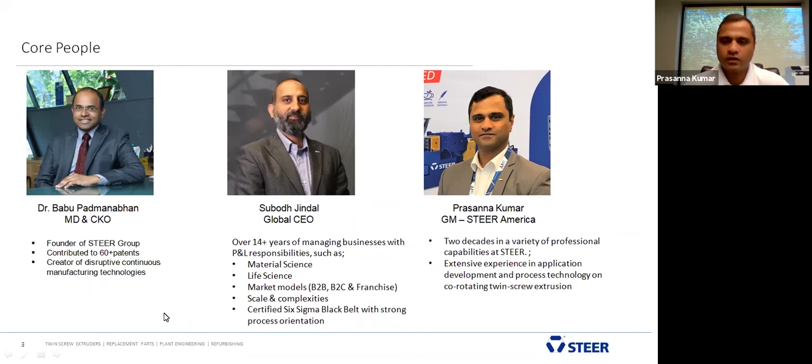Our Steer America office is in Cleveland, Ohio. We have an application development center here as well with 2 machines. One is a 50 dia machine and a 20 lab machine. We are 500 plus employees, 60 plus patents, and 1 million elements sold so far. And we have around 825 extruder installations globally.

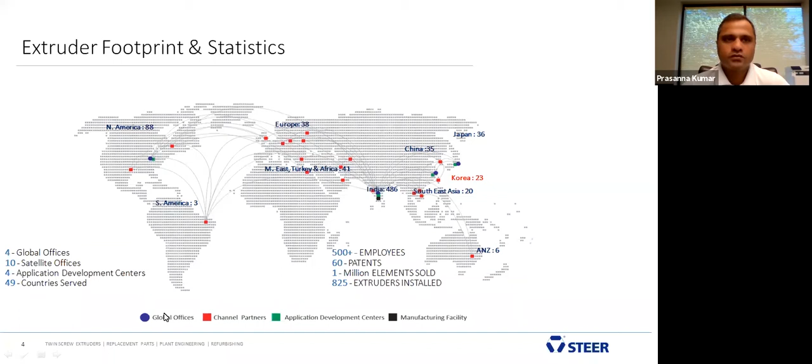We are the only company that's very much vertically integrated, starting from manufacturing the steel up to the end assembly, and everything is done in-house. So we have much better control over the quality and quantity. The industries served are polymer, pharmaceutical, powder coat, food, bioplastic, and biorefining.

We also have 3 different models of extruders. One is mega platform, which is similar to 1.55 DO by DI ratio, available in the industry. We also have 1.49 DO by DI ratio, and Steer's own platform, which is Omega at 1.71 DO by DI ratio. So if you have an existing line which is 1.55 and you're planning to add another line, we can definitely do the same configuration where you'll have interchangeability. That's one of our core strengths.

Our business is divided into 2 parts. One is parts, as in elements, barrel, shaft. For any make, any model twin screw extruder, we can manufacture, we can do reverse engineering, and we have already done this for many customers. And of course, the other 50% is the TSE business that we do.

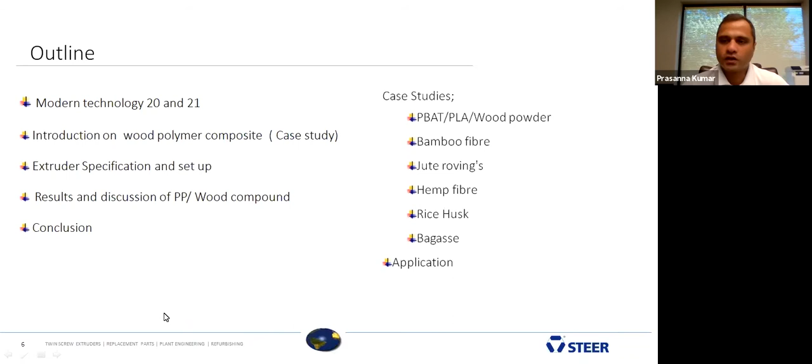I'm going to talk about wood composites and natural fibers, and also discuss today the modern technology - what is 20th century and 21st century. I'm going to discuss wood composite case studies, extruder specification setup, results and discussion on WPC, wood composite. There are a couple of case studies like PBAT and PLA with wood composite powders, bamboo fibers with polypropylene, jute rovings and jute powder with polypropylene, hemp fibers, rice husk and bagasse. These are some applications we are going to discuss today on this topic.

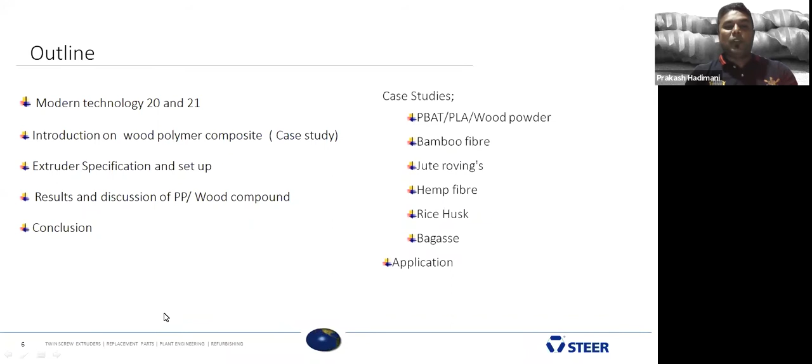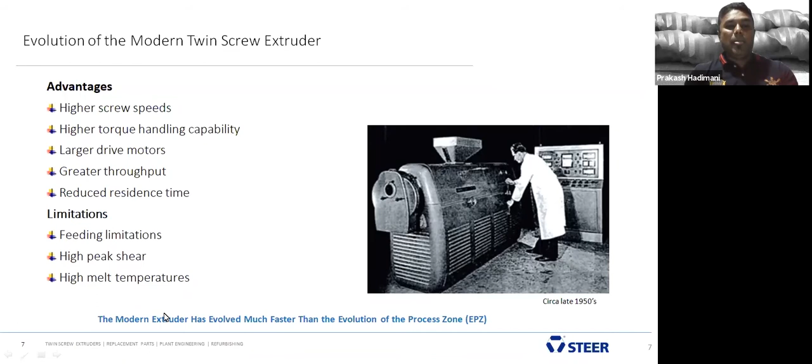It consumes high mechanical power consumption - we call it higher SME, specific mechanical energy. And it also liberates peak shear. The peak shear is not acceptable for low bulk density materials or natural fibers, because the peak shear degrades fibers and liberates black specks. For some applications like flame retardant, that's also not acceptable, and very sensitive materials - it is not acceptable for peak shear.

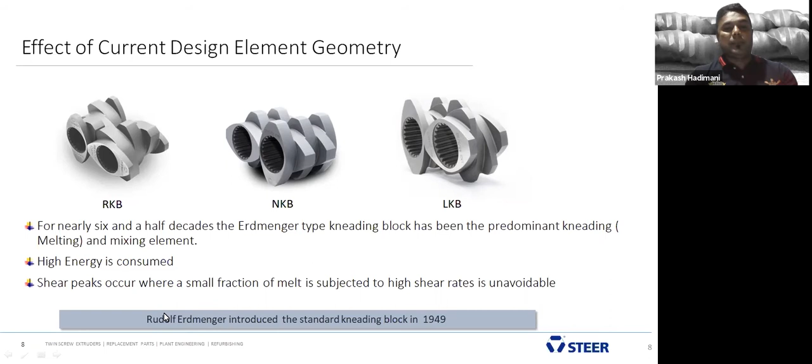What is peak shear we are talking about? When bilobe elements, two lobes, connect, in between there are two lobes - you see here - this area, the first zone, is completely molten material, stagnant. There is a complete pool of melt, and when it goes to the next level, the gap narrows and narrows. There's hardly 3% of melt trapped between the two lobes, and that leads to peak shear that liberates temperature, goes higher, and degrades the polymer.

To overcome these, new material development compromises ourselves. When you're going for standard kneading technology, you cannot use sensitive materials like halogen, non-halogen materials, biopolymers, pearl pigments, and also reinforcement and natural fibers. When you are going for new development, we have to compromise ourselves with a standard kneading block. The peak shear rate results in decomposing flame retardant filler and biopolymers, and degrades the polymer.

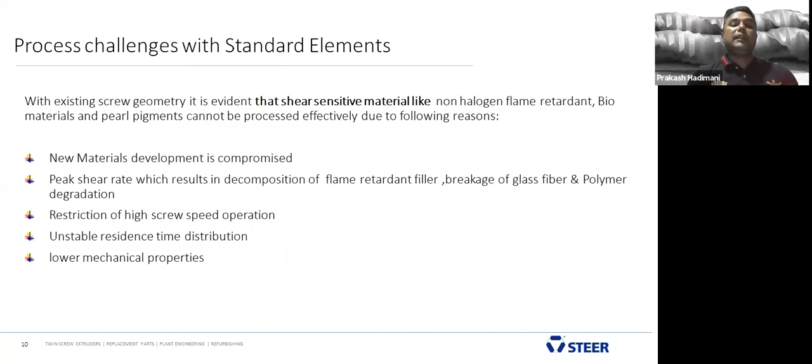Restriction of higher screw speed - the extruder is built for 1200 RPM, but we have to restrict ourselves. When running at 1200 RPM, because of the peak shear, the polymer starts degrading and turns yellow. That's why many operators compromise themselves to run at lower RPM, like 600 RPM. How to overcome this situation? Residence time is not stable - every time there is a change in residence time, and it also lowers mechanical properties. When the polymer starts degrading, the mechanical property drops down.

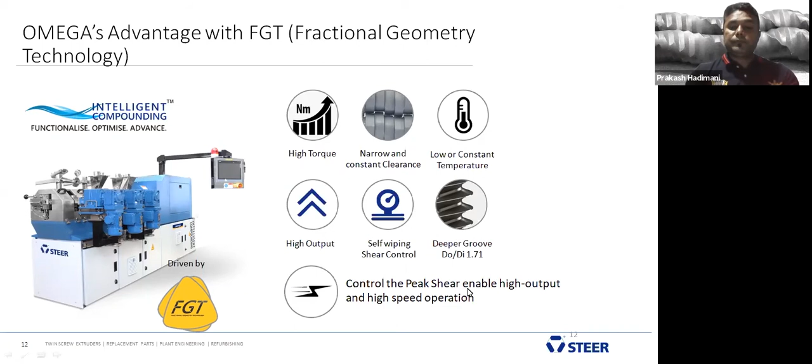To overcome this, we have fractional geometry technology. What is the advantage of fractional geometry technology? Like in the Omega platform: higher torque capability, narrow residence time, narrow clearance, constant clearance through the system, and we have deep grooving like DO by DI 1.71, higher free volume, self wiping, and higher throughput. This controls the peak shear while enabling increased throughput - this is fractional geometry technology.

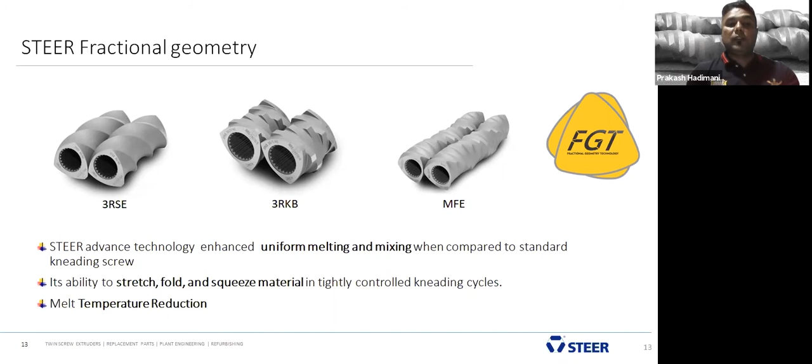3RSE - eccentric conveying elements - convey the material to the next level, advanced technology. And 3RKB provides uniform melting through the system - there is no variation in shear rate, uniform shear rate, and gentle melting takes place in the polymer. MFE, mixing fractional elements, act with a stirring effect, stretching and folding, squeezing the material in the kneading cycle, and also reduce the melt temperature.

What's the mechanism of dynamic stirring elements and fractional mixing elements? When we have wood powder, it has to wet in the polymer matrix, achieved due to the stirring effect. It reduces the melt temperature and also ensures uniform shear rate throughout the system, and distributes the polymer and wood composite, increasing the elongational flow by using fractional mixing elements, which also improves tensile and impact strength.

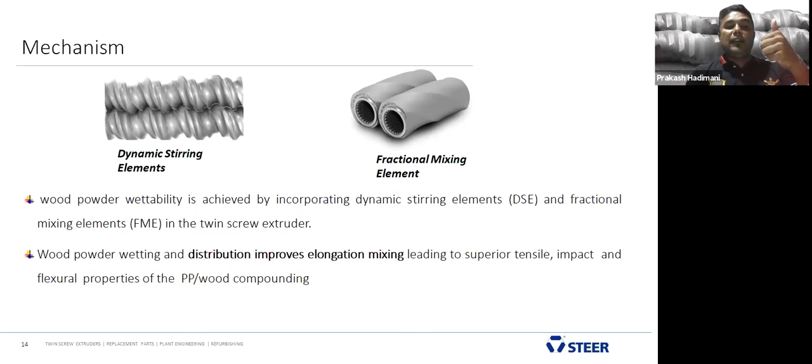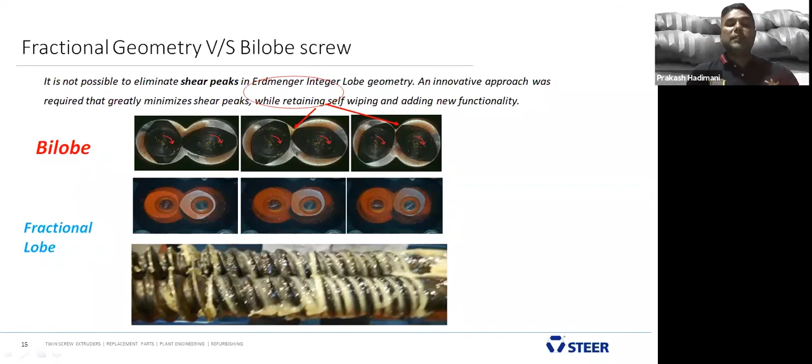There's no degradation. If you see the photo below, it shows the input raw material is white in color, and finally at the metering section, you see that the complete blend is white in color.

If you talk about animals, you can see horn powder and chicken feather - these all come under animal. I'm just giving two examples, but these two examples we have already processed and given solution technology to many of our customers.

When it comes to plants, there's stem - examples like jute and hemp, and also banana fibers. Then there are reeds and grasses like bamboo, and the second thing is bagasse.

When it comes to wood powder and lignin powder, these two we are going to discuss in today's seminar - wood powder and lignin powder along with our biodegradable polymer and the synthetic polymers.

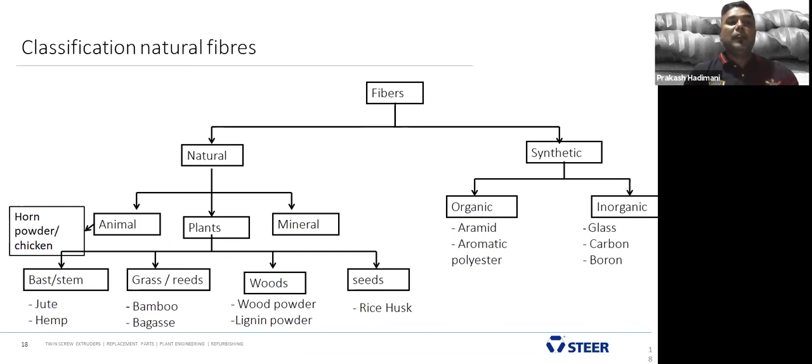Main producers of natural fibers: cotton - everybody knows that's China, India, and USA. Jute is highest produced in India and Bangladesh. There's a big list depending on the fiber - for coir, it's India and Sri Lanka. There are many more.

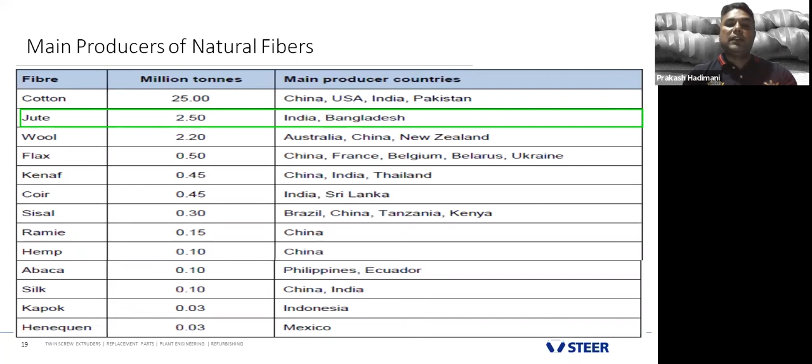If you talk about hemp, it's mainly China, not India, not USA. These are the main hemp producers. And if you talk about silk, producers are China and India.

Why do we need bio-based natural fibers? It's easy - there are many advantages of a biofiller. These are biodegradable, easy to biodegrade. Second, they're readily available, depending on availability. Third, low cost, eco-friendly, and they minimize waste. These are the main advantages of why we need natural fibers.

In the automotive industry, the lightweight advantage comes down drastically because initially the density may be 2.5 or 3, and later when blended with polymer and natural fiber, it comes down to 1.2, so the weight of the car is reduced drastically - that's economically beneficial.

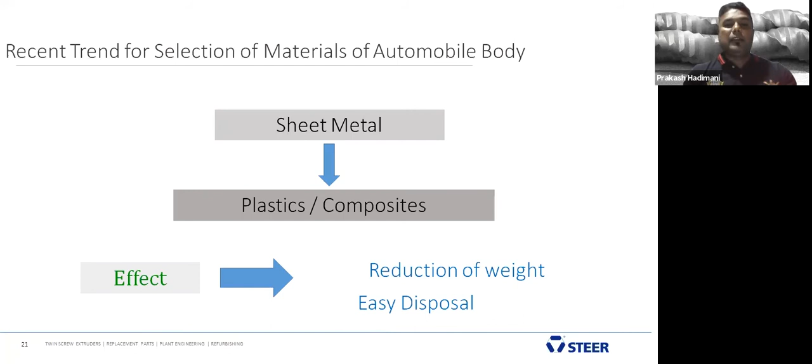Recently, material trend in the automotive industry - initially they were using sheet metal, and later started using plastic and composites. What's the effect? Reduction of weight and easy disposal.

Natural fiber has to be mixed with the polymer. How do we do that? Reinforcement like jute and wood powder are hydrophilic in nature, while the polymer matrix is hydrophobic. We need to mix these two using a compatibilizer as a bonding agent, and a twin screw extruder to distribute the fiber into the polymer matrix and get homogeneous mixing.

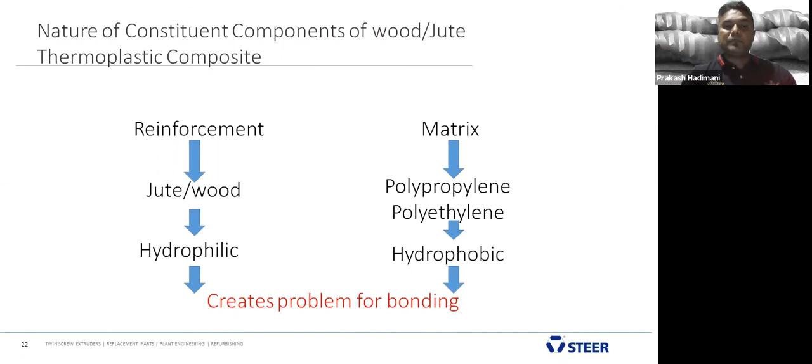Now we go to the first case study of wood powder. Why do you need wood powder? The wood powder blends with the polymer, and any shape can be molded. If you take just wood powder or jute powder alone, can you mold it as you want? No, we cannot. But when you mix it with a polymer, the shape can be formed as required, for construction or any other application, depending on your needs.

That is the beauty of WPC, wood composite applications. Depending on the requirement, color can be added and changed to red, blue, or many other colors. But if you're using natural wood, the color cannot be changed. Whatever color you get, that's what you need to work with. When you make it into WPC, the color can be whatever you want.

If you compare plain wood and WPC, WPC stays for a longer period of time. The wear and tear is reduced because of the polymer coating, which withstands longer and reduces moisture content. If you leave wood in a humid environment for a long time, it starts absorbing moisture and loses its properties. But polymer-coated WPC retains its properties for longer, and moisture absorption is very minimal. There's also better heat resistance, making it suitable for building, construction, and many other applications.

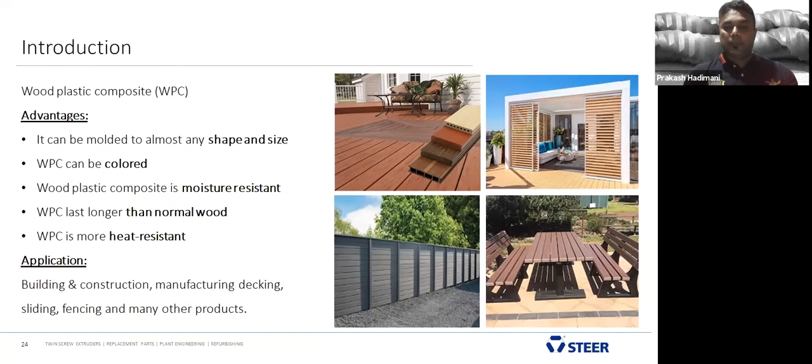I'm comparing the current technology with our FGT technology. The current technology I'm talking about today is counter rotating, a two-stage process. Still, 80% of customers in the WPC and natural fiber industry use single screw or counter rotating methods. What are the drawbacks of counter rotating? You cannot go more than 60 RPM; it runs at a lower RPM. But Omega is a single stage process, unlike counter rotating which is two stage, where you have to mix and then go to the next level.

Omega can run even at 300 to 600 RPM. With counter rotating, if you pre-mix everything, you have to pre-dry it. But with twin screw, you don't have to pre-dry; you can just feed it into the extruder using a split feed method.

Counter rotating results in poor dispersion quality and elongation, while twin screw extruders give higher dispersion. With counter rotating, to get higher throughput you need a larger extruder. But with twin screw, the smaller the extruder size, the higher the capacity, because a smaller extruder is capable of giving higher throughput. Counter rotating also has higher SME, while TSE has lower SME and lower power consumption. There's also batch to batch variation in counter rotating, but no variation in TSE since it's an inline process. TSE also gives higher throughput with FGT technology compared to lower throughput in counter rotating.

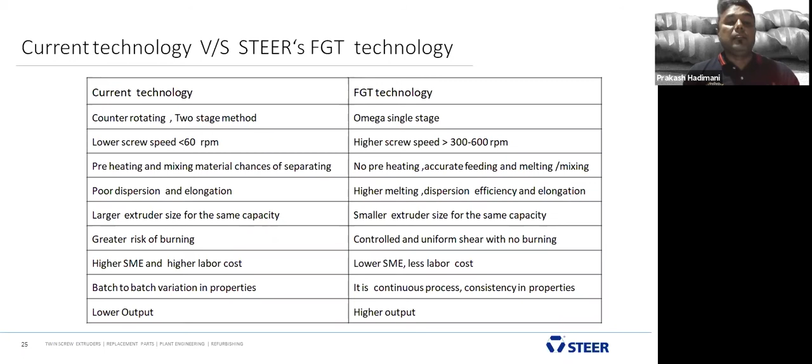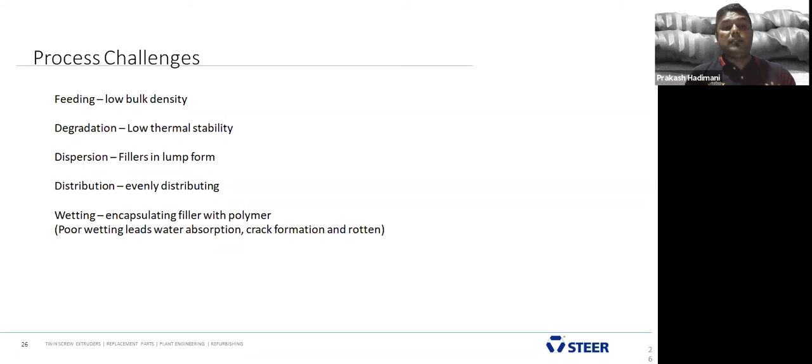What are the process challenges? Currently in TSE there are many challenges: feeding low bulk density material, and natural fiber tends to degrade, form lumps, and absorb moisture. Wetting wood powder into the polymer matrix is the biggest challenge, and dispersing it is another challenge with wood powder.

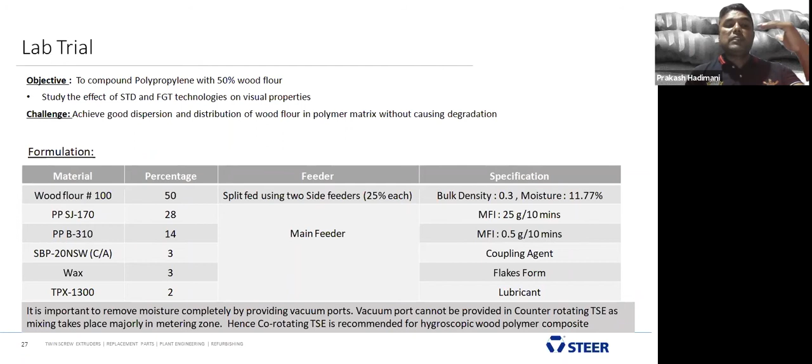We have done a lab trial on WPC. Our main aim is to conduct a trial. We used two technologies: one is standard bilobe technology, currently used in the industry for twin screw, and we also used FGT technology. We took these two screws and technologies in the twin screw extruder and used polypropylene and wood composites.

The wood powder content was 50%, with a mix of polymer, polypropylene and others. We used two wood powder sizes, one 30 mesh and another 100 mesh, and fed through a split feed method, 25-25, in two stages.

The bulk density we used was 0.3 or less, and the moisture content observed was almost 12%. We didn't pre-dry, since our twin screw extruder, the FGT, is capable of removing moisture.

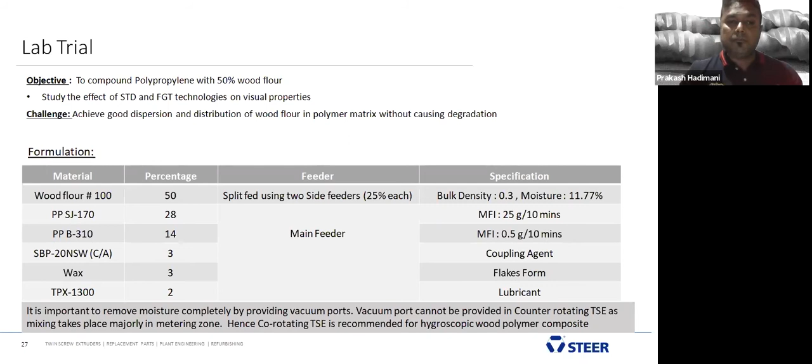The screw speed was 350 to even 600 RPM. The throughput was 100 kg in the 40 millimeter extruder. With 100 mesh, the specific mechanical energy increased, but with 30 mesh, the specific energy reduced.

Mixing takes place because we used two standard technologies: one is the standard bilobe technology, second is FGT technology. Only the screw changed, but the feeding method and everything else stayed the same. Process parameters were not changed, and we collected standard technology samples and FGT samples, tested them in an injection molding machine, and took results.

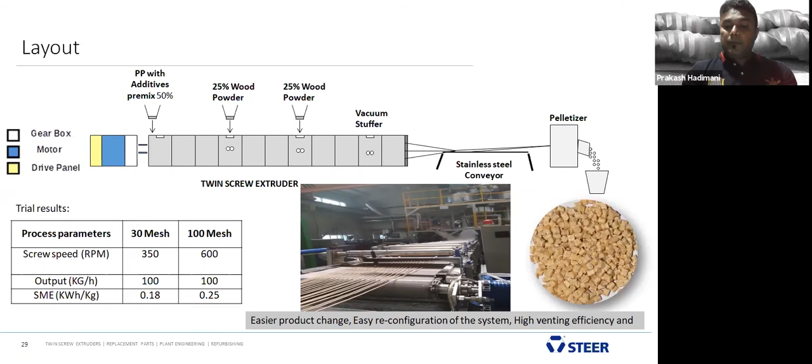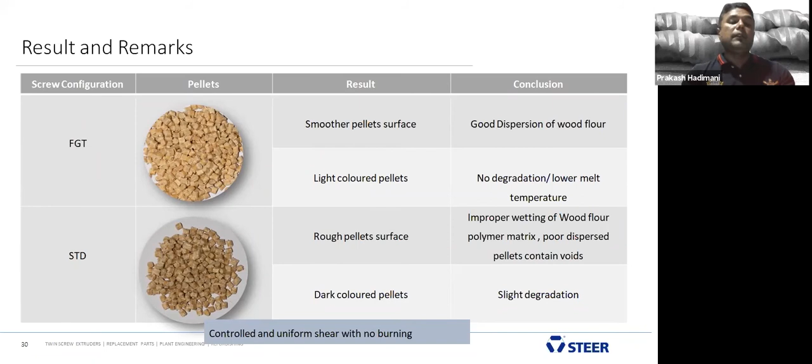In the standard technology, we observed a rough pellet surface and higher moisture content. More interestingly, the pellets were darker in color, and we observed slight degradation. The wetting was very bad, improper wetting of the pellets, and poor dispersion of the wood powder into the polymer matrix. We also observed many voids and particles in the standard technology, possibly due to improper wetting of fiber, distribution and mixing.

If you use fractional geometry technology, it reduces the melt temperature with no degradation, and the shear rate throughout the system is lower. There's no degradation of wood powder in the FGT, but we observed degradation in the standard technology.

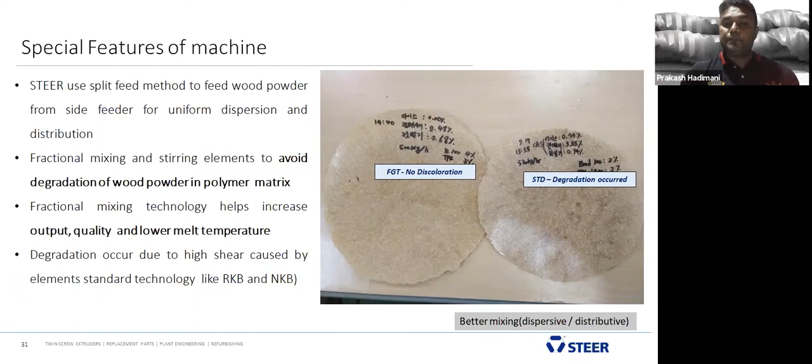What benefits does this give after using FGT technology? We finally observed that with FGT technology, we can handle biodegradable polymer, polyethylene, polypropylene, PVC, and PLA. We can do combinations of these, and we've also done a series of studies with wood fiber, sawdust, jute, bamboo, rice powder, and many others. This combination we provide to the customer.

Using FGT technology gives controlled elongation mixing and lower temperature, and also good dispersion and distribution of the pellets, high quality pellets, and no degradation in the fiber. It helps customers load up to 30 to 60% of wood powder.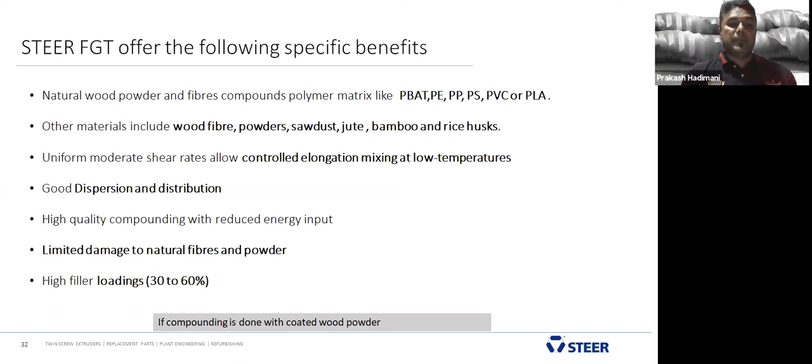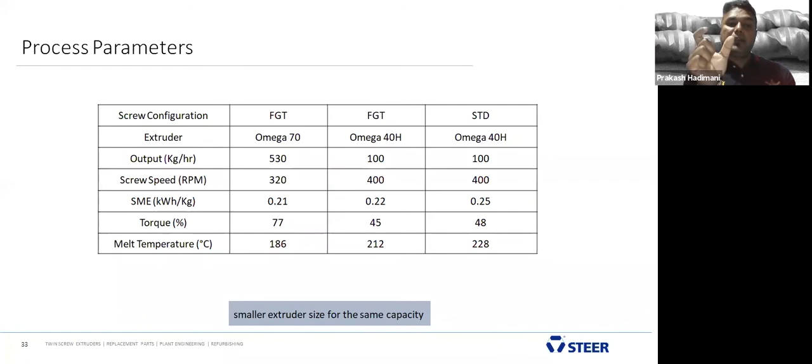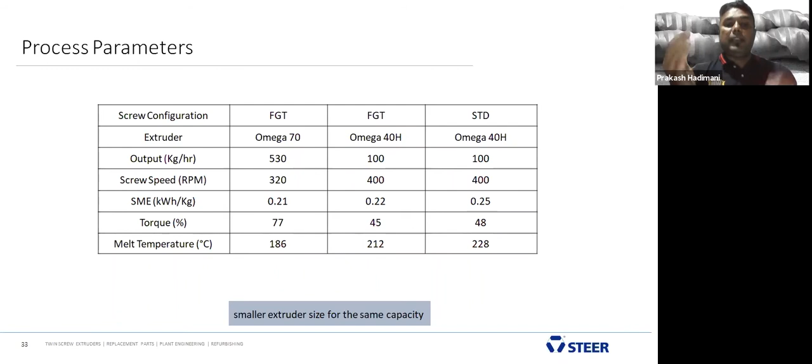This is a similar comparison study we did in our lab. For FGT technology we used a 70 millimeter extruder, Omega, and also FGT technology on a 40 millimeter, so we could compare the difference between the 70 millimeter and the 40. When scaling up, we didn't find much difference between lab scale and bigger scale, but we did observe a difference with the standard technology.

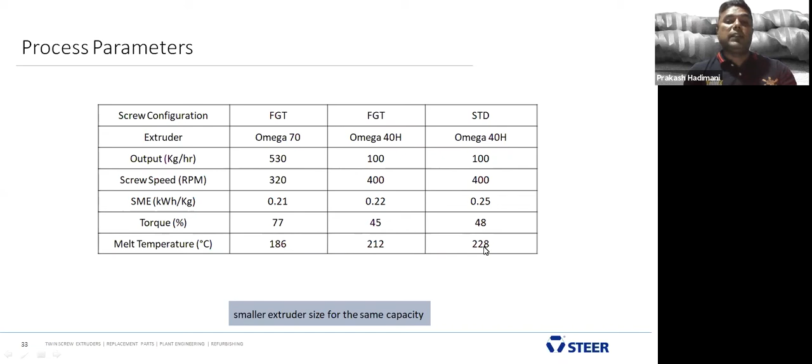In the 70 millimeter extruder we achieved 530 kg per hour, but for FGT in the Omega, both standard and FGT maintained the same output, 100 kilo, with constant RPM. Looking at specific mechanical energy, power consumption was higher in standard technology compared to FGT. Also, melt temperature showed a 40-degree variation between our 70 millimeter FGT technology and the standard. FGT 70 gave 186 degrees centigrade, but standard technology gave 228, a 40-degree higher melt temperature in standard technology.

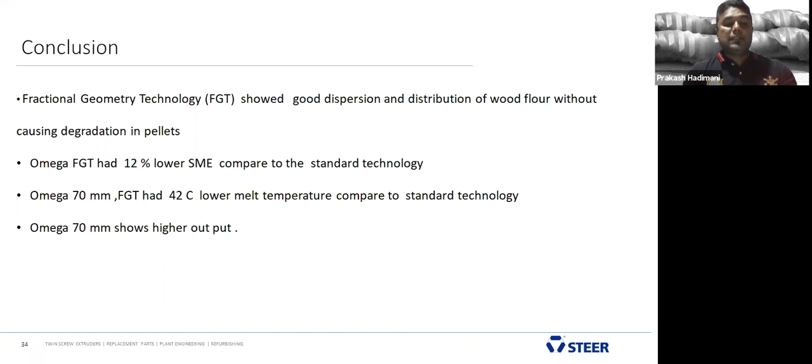Finally, we concluded for WPC wood composite: fractional geometry technology showed good dispersion and distribution in the wood powder without causing any degradation on the pellets. Omega FGT has 12% lower SME compared to the standard technology. Omega 70 millimeter FGT technology had 42-degree lower melt temperature compared to standard technology, and Omega 70 millimeter showed higher throughput compared to the standard technology of 40 millimeter.

Now we are going for the biopolymer. The first case study we demonstrated was on polypropylene and wood composite, and we did a similar case study for biodegradable polymers, biodegradable PBAT. I will not go much deep into the biodegradable polymer, but I'll show you the sample. What we did: 80% of PBAT, polybutylene adipate terephthalate, and 20% of wood composite. We blended and observed good dispersion, and also added 30%. We are planning to go for 40% and 50% next, and are still working on 40% of wood composite into the PBAT.

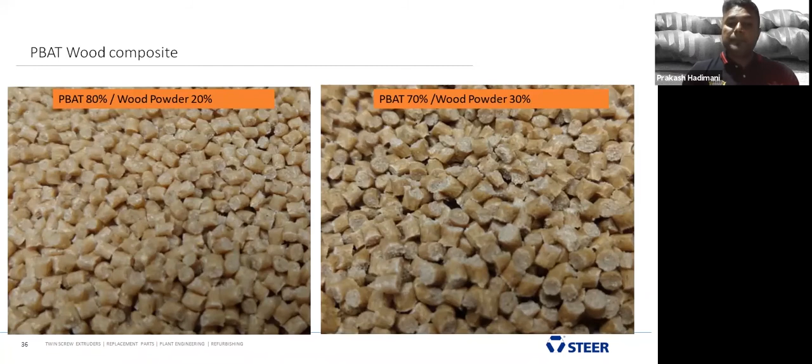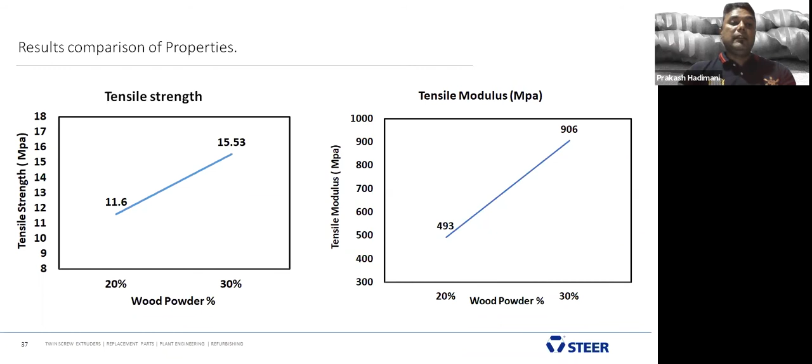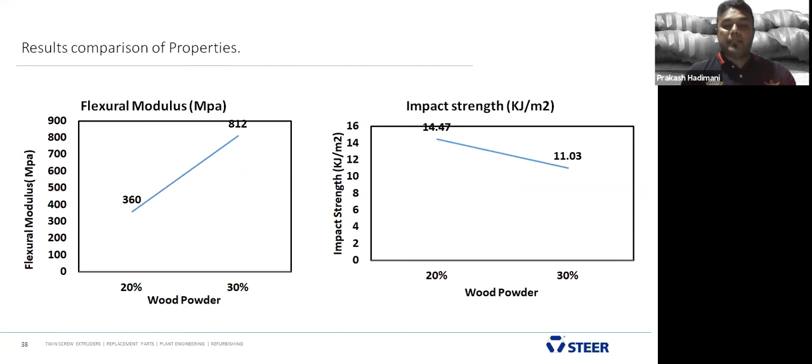We did a similar study for PLA, polylactic acid, with wood composite at 20% and 30%. We were able to manage the compound, but unfortunately, when it went to injection molding, we could not make injection molded samples. Maybe we need to go for compression molding and other studies. The injection molded sample didn't even flow in the injection process. We are planning to understand further why it is not flowing in injection molding, maybe due to viscosity. The compounding is not an issue, but when going for molding for the next study, we could not make it.

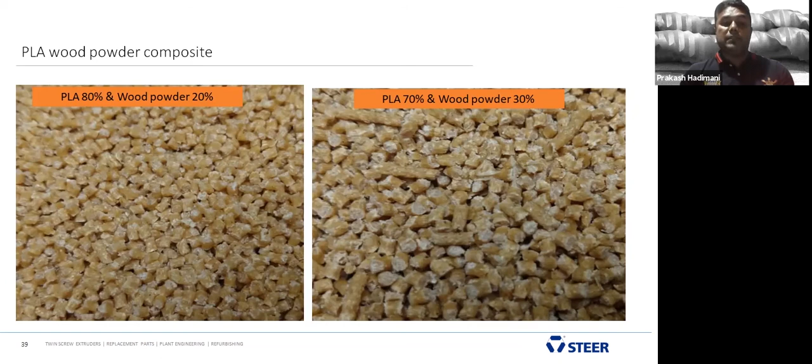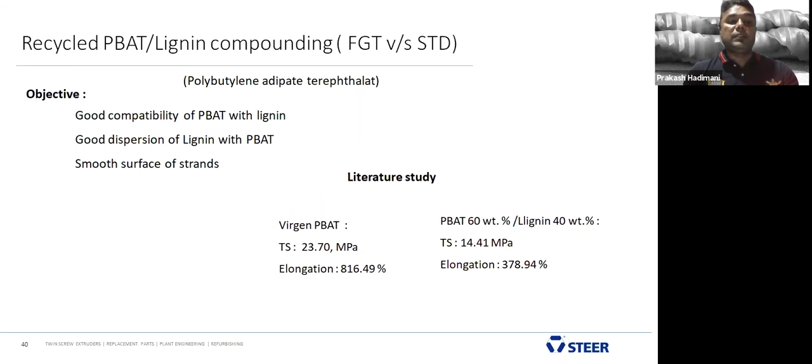The second study we did was on recycled PBAT with lignin powder. We studied many literature surveys. Our main objective is to get good dispersion of the lignin powder with the PBAT, and also a smooth strand surface. We also did some literature survey on virgin PBAT mechanical properties. When you combine PBAT 60% and 40% lignin powder, you get 14.4 megapascal tensile strength and elongation of 378. It also depends on the grade of PBAT used; elongation depends on that grade.

In this study, we fed PBAT from the intake, made it into homogeneous form, melted it, and added 30% lignin from the side feeder. We used our FGT technology to mix and distribute completely, and then took the sample out. We used a 25 millimeter lab extruder. We did two studies: one with 17% lignin powder and one with 30%, with PBAT at 83% and 71% respectively. We maintained constant throughput of 10 kg throughout the system. T1 shows the FGT technology.

We compared standard versus FGT technology. With FGT technology, we observed power consumption of 3.7. As the addition of lignin increases, there is an increase in power consumption - at 17% and then at 30%, there is an increase in power consumption and SME increases. Melt temperature doesn't change much. But comparing standard versus FGT technology, keeping RPM constant at 300 for both, the torque is slightly increased in standard technology, and power consumption is increased in standard technology. We also observed peak shear and degradation, and a slight increase in melt temperature with the standard technology.

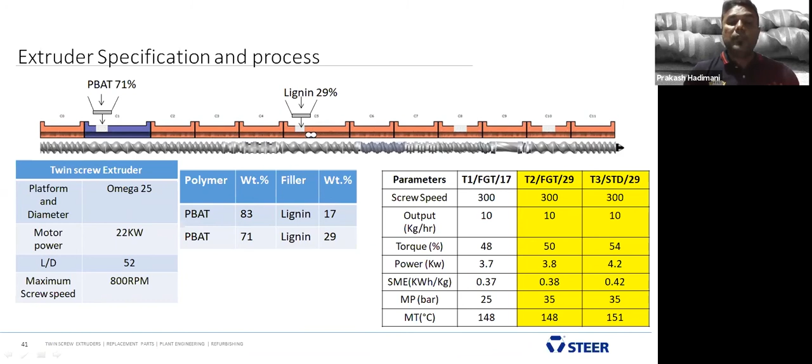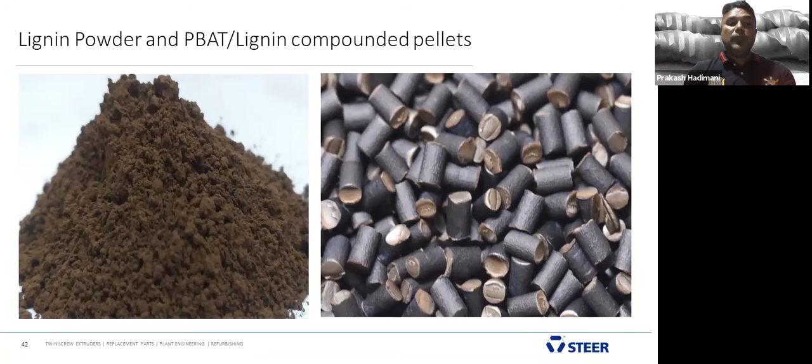If you see the rheology study on virgin PBAT versus recycled PBAT, we observe we are getting thermal stability at 2.29. When you add lignin, it increases the thermal stability even further, and at 30% there's still further increase in thermal stability.

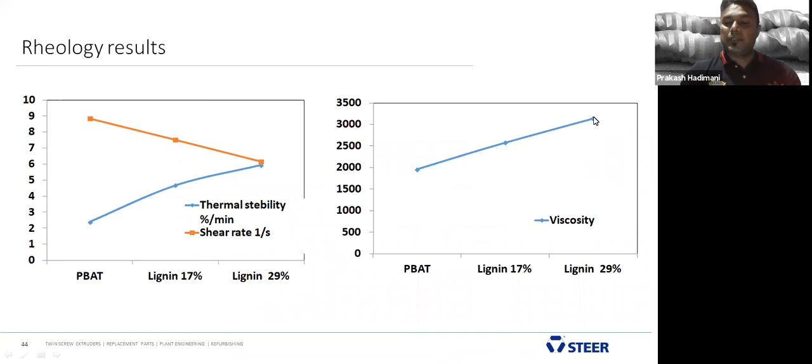The second case study we are going on is jute polypropylene. There are many advantages to jute polypropylene: it gives you lighter weight, and here we have used FGT technology to improve it. There are many challenges too; feeding of the jute into the polymer matrix and into the TSE, twin screw extruder, is the biggest challenge. It also gives higher mechanical property compared to even wood.

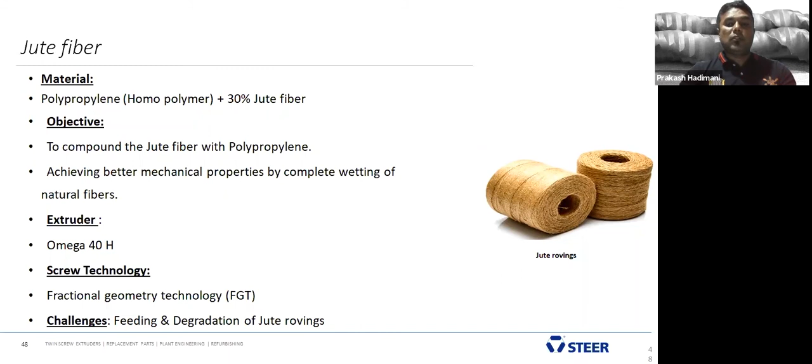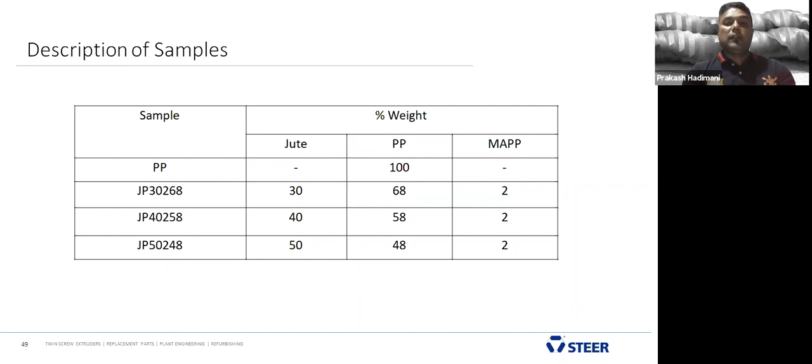Higher tensile strength we observed is from long jute, not chopped jute—it's long, twisted jute. We conducted trials at 30%, 40%, and 50% jute, using homopolymer polypropylene and a coupling agent, constant for all systems. We fed polypropylene from the intake and jute at 30% and 50% from the side feeder, and we were able to manage 50% jute, achieving 100 kg per hour in a 40 millimeter system.

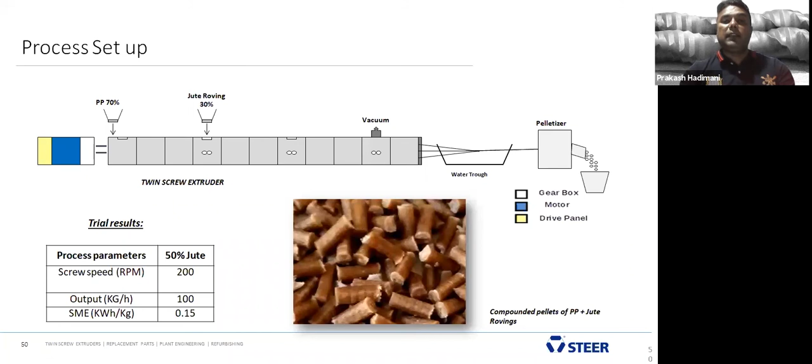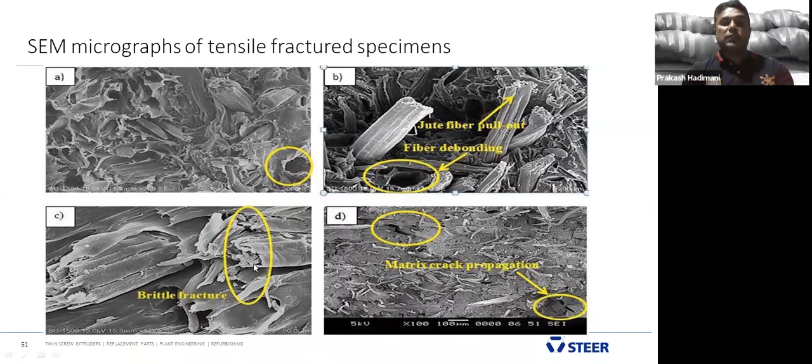These are the pellets, and we observed a smooth surface with no degradation. If you see the morphology, we see better wetting of jute onto the fiber completely. In some standard samples, we observed jute pulling out from the polymer matrix, which we call fiber debonding and fiber pull out. We also observed brittle fracture in some fibers because the polymer wetting was very bad, showing a brittle fractured surface.

If you see the results and discussion on tensile strength, the virgin polymer shows 35 megapascal, and addition of 30% jute slowly increases the tensile strength. At 50% we observe 55.78, almost a good tensile strength compared to other wood powder systems.

Jute is giving better tensile strength, and comparing flexural modulus, again addition of jute increases it, almost touching chopped glass fiber levels. Chopped glass fiber is similar; if you add 20 to 30% glass, we are reaching 5,000 to 6,000 flexural modulus, but jute itself gives better flexural modulus.

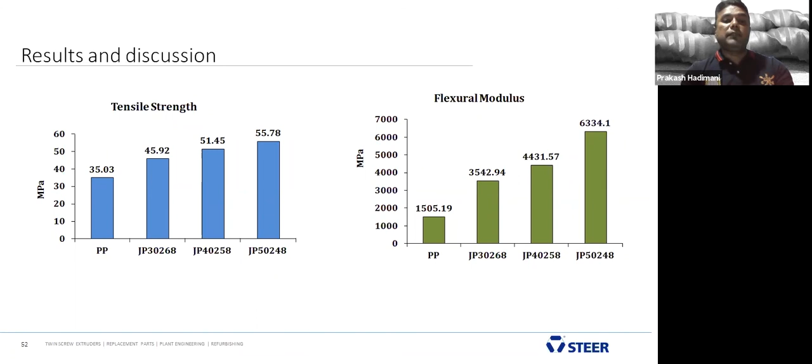And there are many other case studies. I'll just go into them one by one, so as not to waste time.

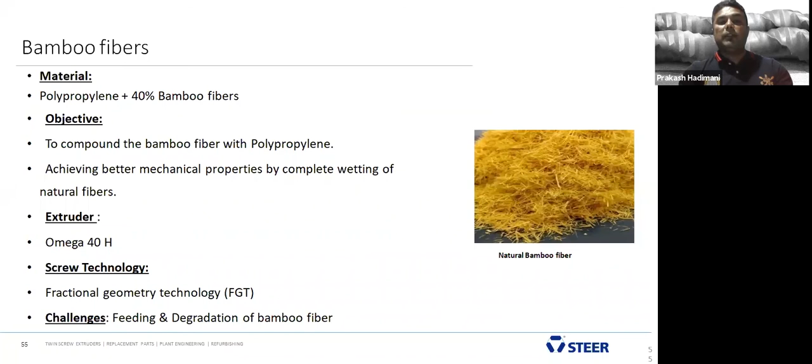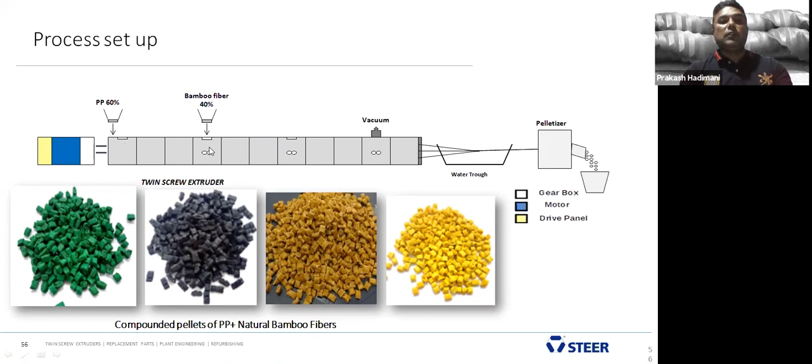We have done a case study on bamboo fiber also, with the same objective as before. We used Omega 40H class with FGT technology, and 40% bamboo fiber. There are many colors we have added into the bamboo compounds, green and many others can be done using bamboo powder. This is the same setup using polypropylene and bamboo powder.

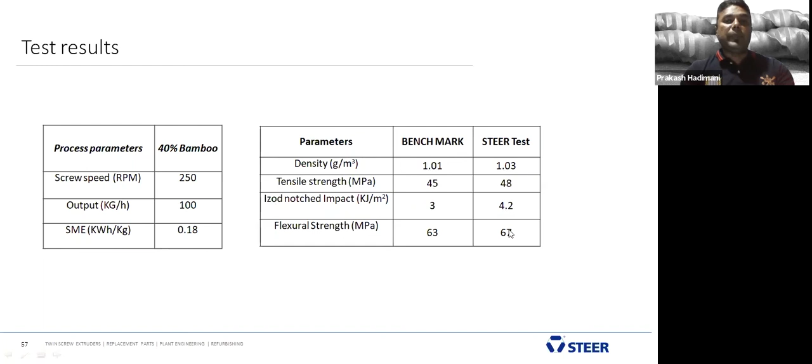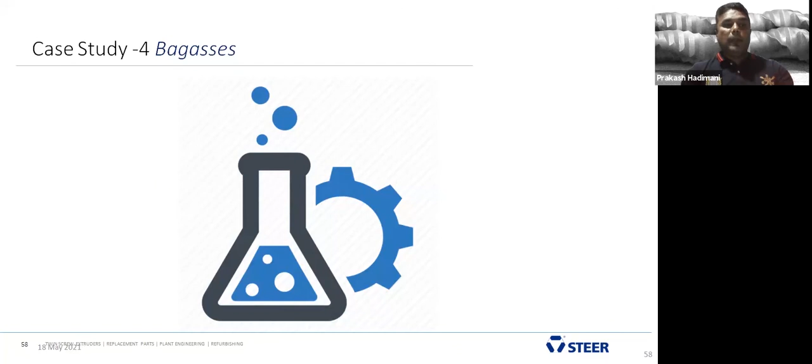For the fourth case study, we are going for bagasse. We added 20 to 50% bagasse, using the Omega 40H class. Here we had a lot of challenges - inconsistency of feeding bagasse because it was so wet, and there are no uniform fibers in the bagasse. Degradation of bagasse is again the biggest challenge.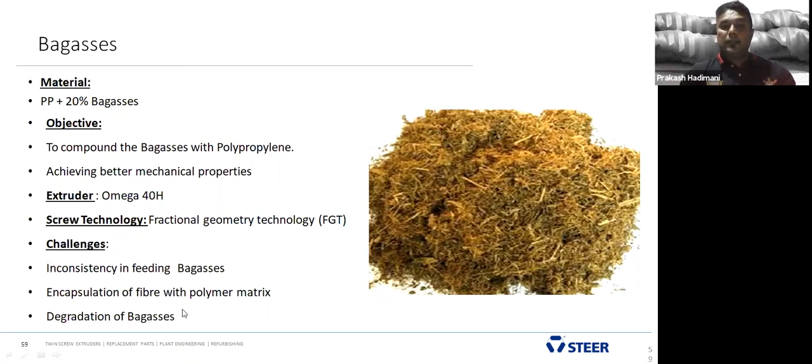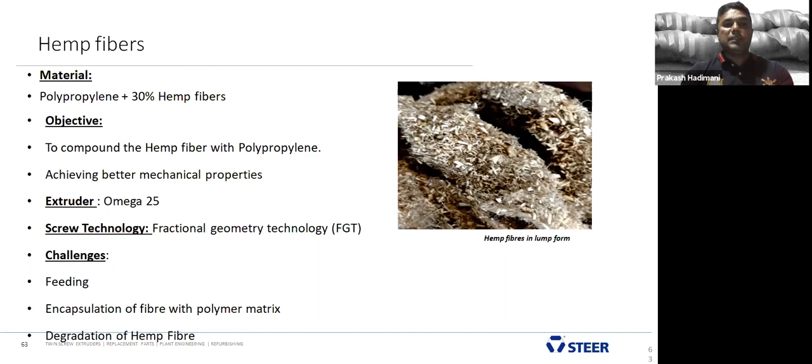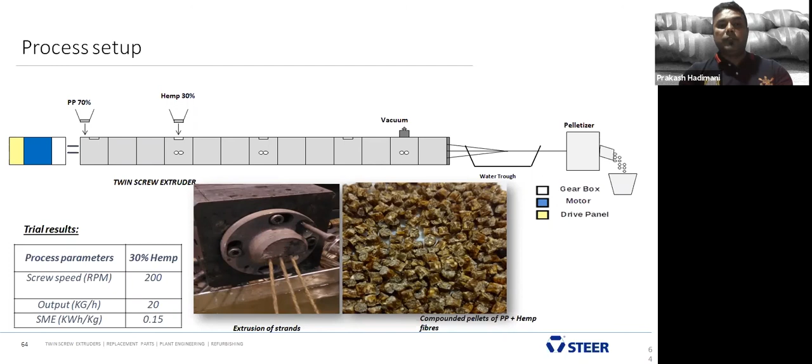We could manage 30% feeding with the polypropylene. These are the pellets - 30% hemp using the same Omega 70/30 combination, feeding hemp from the side feeder. We could manage better dispersion, but we are still trying to complete the mechanical property testing. Our next step is to understand the mechanical properties.

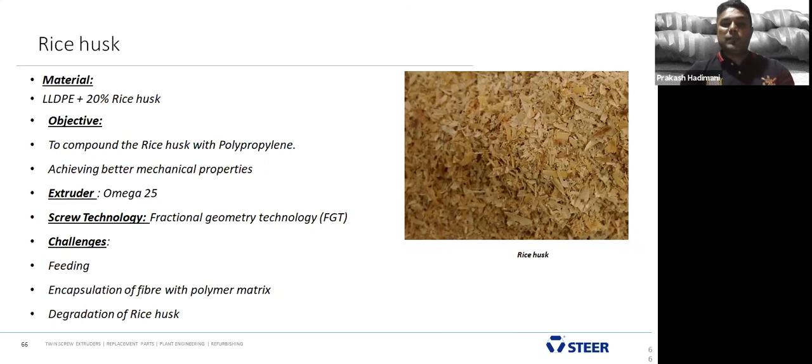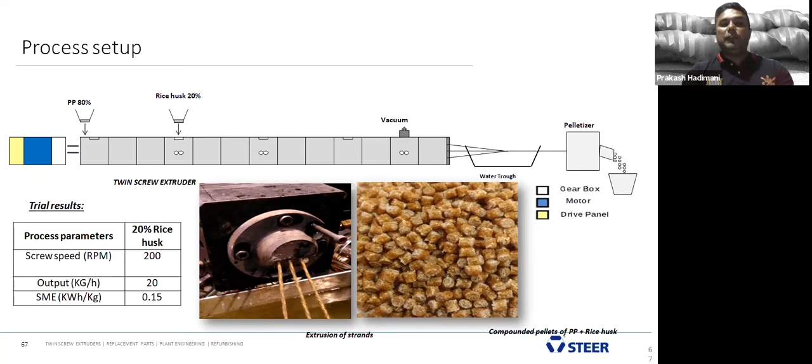Last but not least is the rice husk case study. This was much easier to process - not many issues because it's easily flowable, so we could disperse it well. These are the pellets from rice husk. We used our lab extruder, 25 millimeter, with RPM of 200. We could manage 20 kg per hour, and the SME was 0.15. Polypropylene was melted from the intake and mixed, rice husk fed from the side feeder, using the strand cutting method.

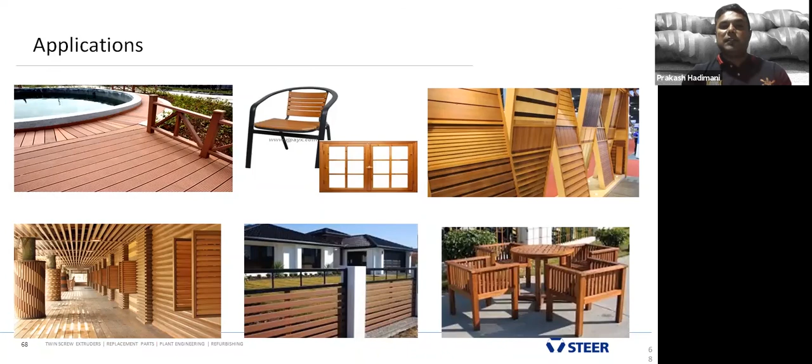These are some applications we use for WPC composites. And this is our Application Development Center in Bangalore, India.